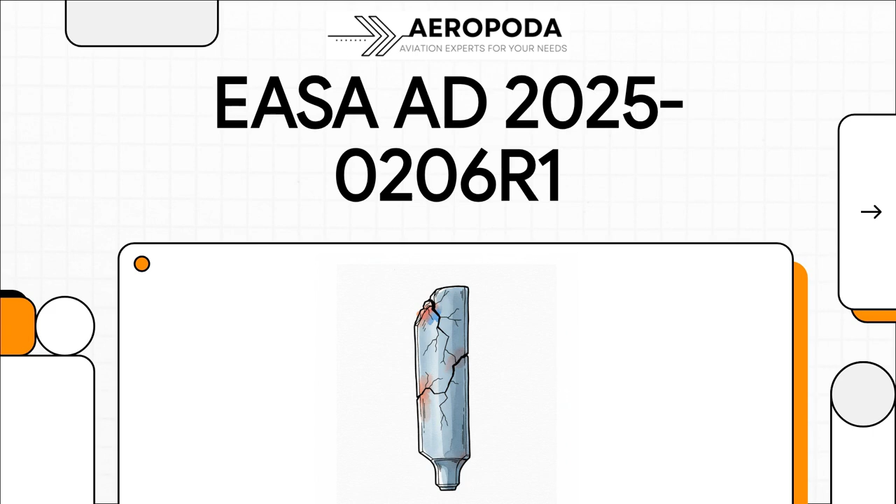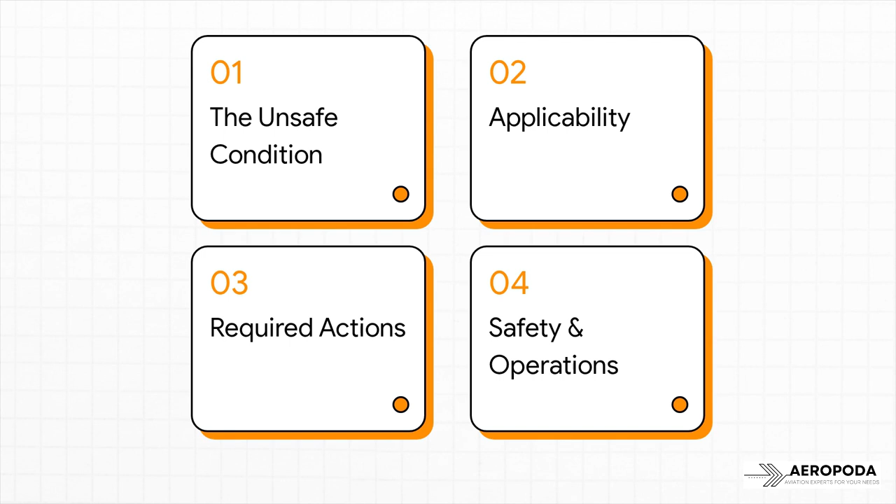Here's what we're covering. First, we'll look at the unsafe condition that got this whole thing started. Then, we'll pinpoint exactly which engines and aircraft are affected. After that, we'll dive into the required actions for compliance, and finally, we'll talk about the overall impact on both safety and day-to-day operations. So, first things first, why was this AD even issued?

Let's get right to the heart of the risk that the regulators are trying to get ahead of. The core problem here is something EASA is calling in-service deterioration of the high-pressure turbine blades. This isn't just your standard wear and tear. We're talking about a specific kind of degradation that's happening outside of what normal maintenance plans would catch, and that's why it needs this special targeted intervention.

And this is where it gets really serious. EASA lays it out in black and white, and they don't mince words. They say that if this condition isn't found and fixed, it could lead to blade failure, which could then cause an engine to shut down in mid-flight, ultimately resulting in reduced control of the aircraft. That's the exact chain of events this AD is designed to prevent.

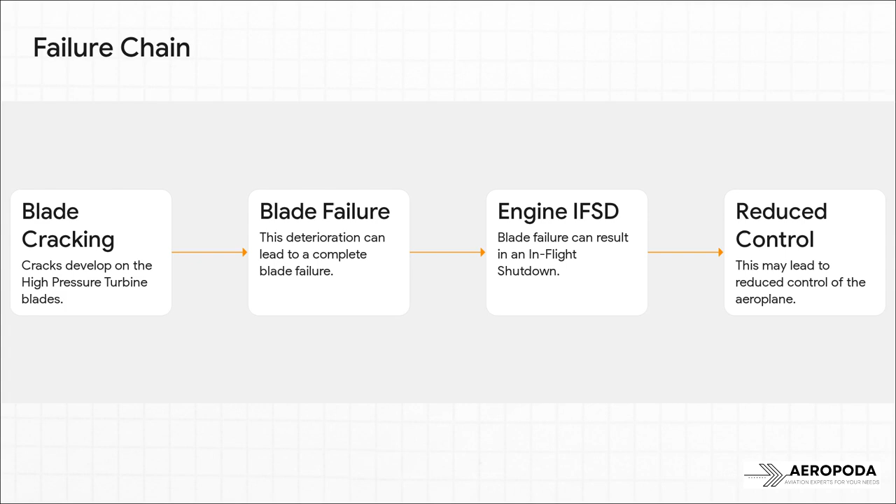You can really see the domino effect here. It all starts with tiny cracks developing on the HPT blade. If that's not caught, it can lead to a full-on blade failure. From there, you're looking at a potential in-flight shutdown, and in the absolute worst-case scenario, it could compromise the pilot's control of the plane. Every single step here is a critical link in the safety chain.

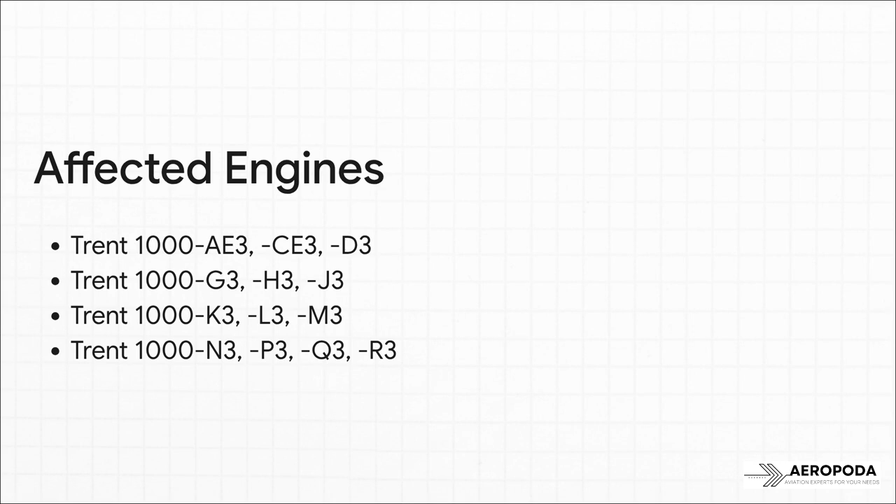Okay, so who needs to be on high alert for this one? Let's dig into the applicability to see exactly which engines and operators are in the scope of this directive. This AD covers a really wide range of the Rolls-Royce Trent 1000 family. We're talking about the AE3, CE3, and D3 variants, all the way through the G3, H3, J3, K3, L3, M3, and even the N3, P3, Q3, and R3 models.

It's a comprehensive list. And here's a detail you absolutely cannot miss. This isn't limited to a specific production run or a small batch of serial numbers. Nope. This directive applies to all serial numbers of those engine models we just listed. No exceptions. And to put all this into context, where do you find these engines? Well, the Trent 1000 is one of the main power plants for the global fleet of Boeing 787s, so that gives you a very clear picture of the aircraft we're focused on here.

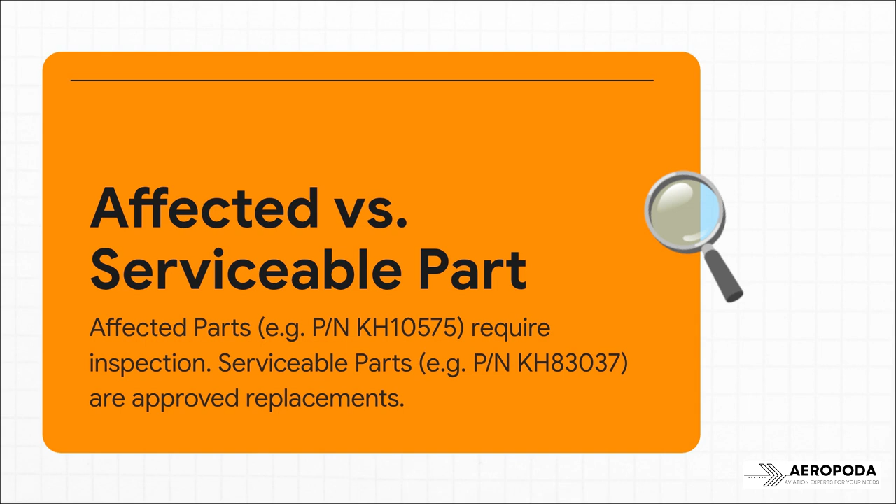All right, let's get to the part everyone in CAMO, maintenance, and engineering is waiting for. What do you actually have to do to comply with this thing? First, we've got to get the terminology right, because it's super important. The AD makes a clear distinction between an affected part, that's the HPT blade, like part number KH10575, that needs to be inspected, and a serviceable part, like part number KH83037, which is the approved, good-to-go replacement.

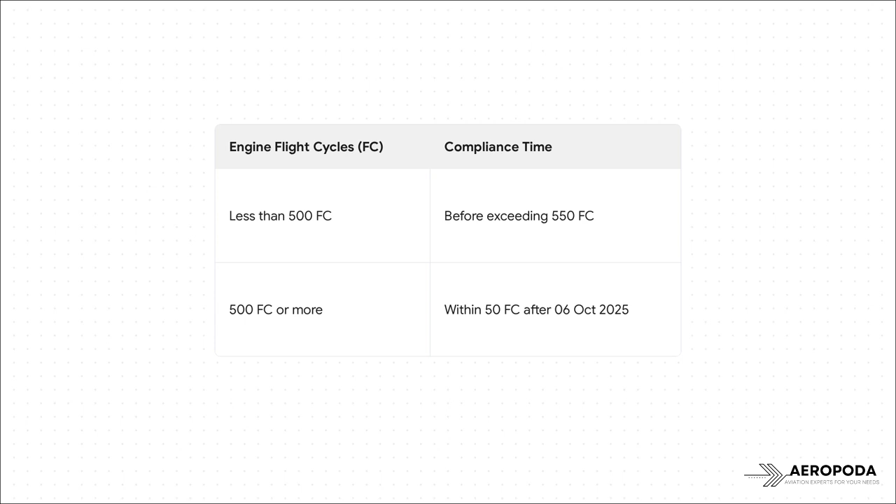So the clock is ticking, and the AD lays out very specific deadlines for that first inspection. For engines that are pretty new, with less than 500 flight cycles, you need to get that inspection done before they hit 550 cycles. But for the higher time engines, those with 500 or more cycles, the timeline is way more urgent. You've got to get it done within just 50 flight cycles after October 6, 2025.

And this, of course, is the million-dollar question for any maintenance crew, right? What's the game plan if one of your on-wing inspections actually finds a crack? The AD gives you a very clear tiered action plan, and it all comes down to the size of the crack. If you find a crack on the leading edge that's 3 millimeters or smaller, you go into a heightened watch mode. That means follow-up inspections every 10 flight cycles.

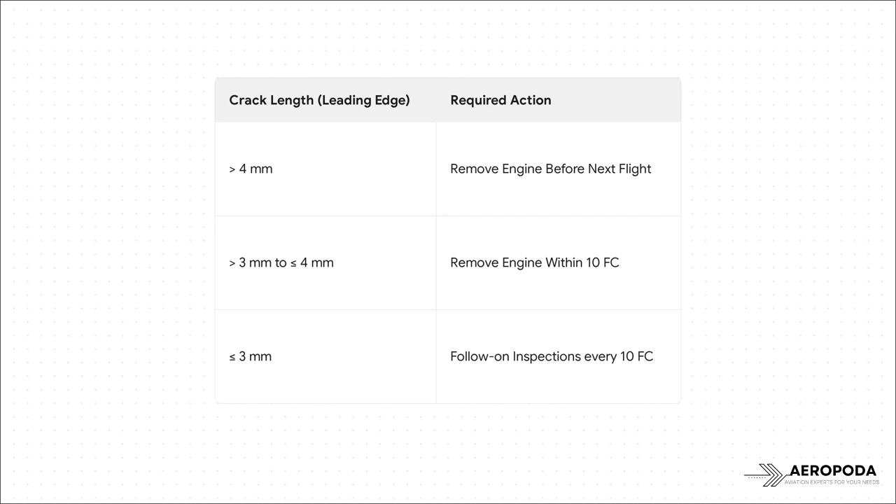If the crack is between 3 and 4 millimeters, the engine has to come off the wing within 10 cycles. And if you find a crack bigger than 4 millimeters, the action is immediate. No discussion. That engine has to be removed before the very next flight.

Now, for operators who are not fans of doing these checks over and over again, there is a way out. It's called a terminating action. Basically, if you modify the engine according to the Rolls-Royce Service Bulletin, that's Trent 1000 72K335, you can put an end to these repetitive inspections for good on that engine.

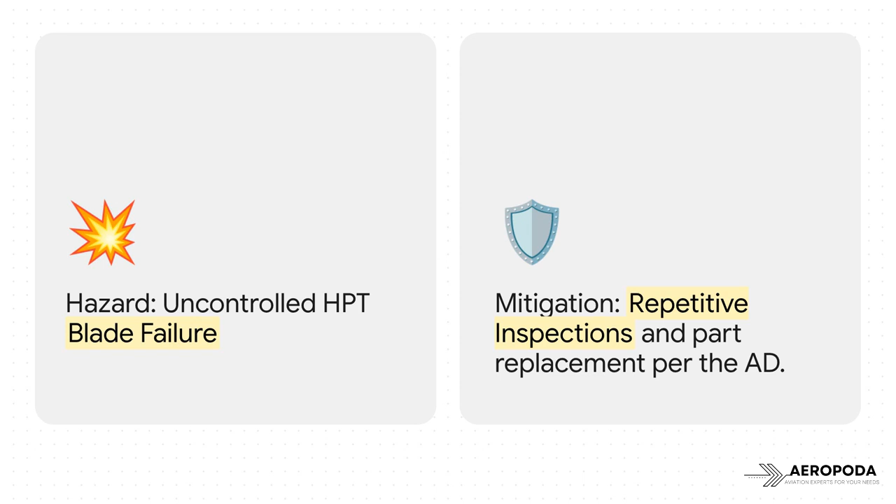It's the long-term fix. Okay, so let's zoom out for a second and look at the big picture. What does all of this really mean for airworthiness and for the tough business of running an airline every day? When you boil it all down, the safety logic here is pretty straightforward. The hazard is an uncontrolled failure of an HPT blade. The fix, or mitigation, is this mandated program of repetitive inspections and replacements. It's a textbook case of proactive safety management in action.

From an operational standpoint, the impacts are huge. This is way more than just a minor inconvenience. We're talking about an increased maintenance burden, sure, but also the very real threat of an unscheduled engine removal, which can easily lead to a costly aircraft on-ground situation. This puts a massive strain on your supply chain to have parts ready, and it's a huge coordination headache for planning teams. Simply put, missing these deadlines isn't an option.

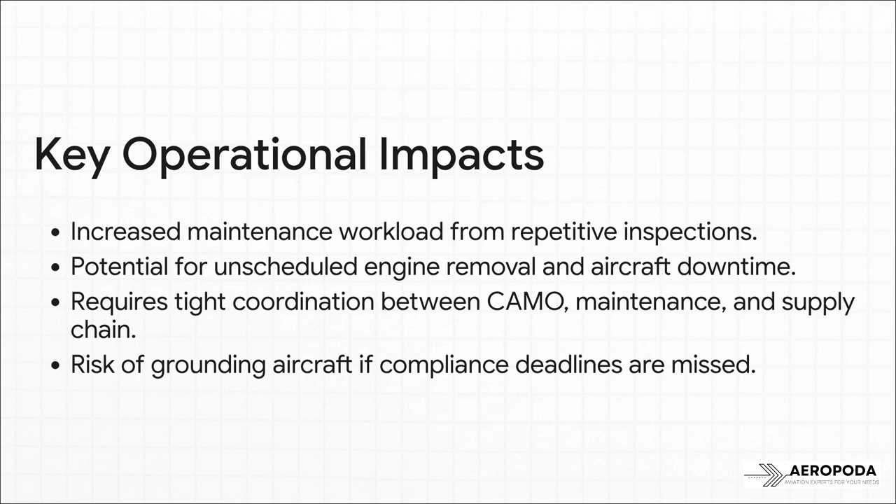So let's wrap this all up. Who's affected? Operators of those specific Trent 1000 engines, mostly found on the Boeing 787. What do you have to do? A strict program of repetitive inspections, with follow-up actions that depend entirely on what you find. And when does it need to be done? You have to follow those strict flight cycle deadlines and compliance times laid out in the AD.

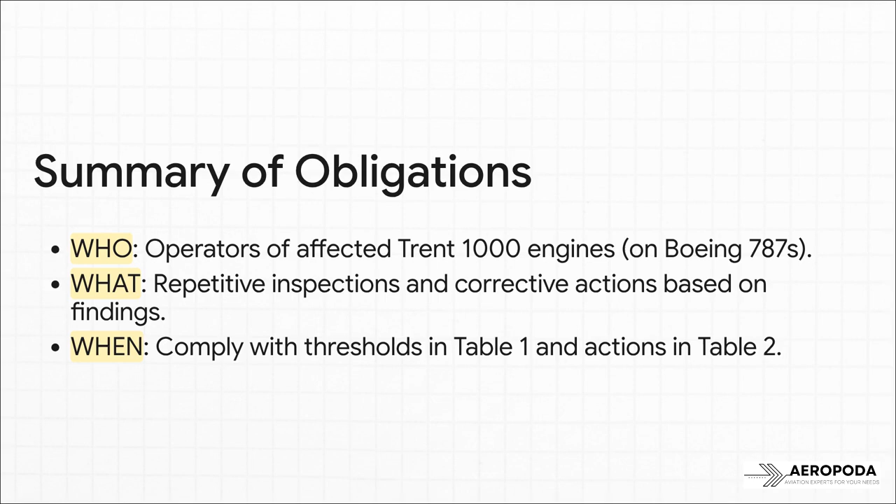And look, I really can't stress this enough. While this explainer gives you a solid overview, it is absolutely no substitute for the official documents. Every operator must refer to the official EASA AD text and all the related Rolls-Royce service bulletins to ensure full compliance. They are the final word.